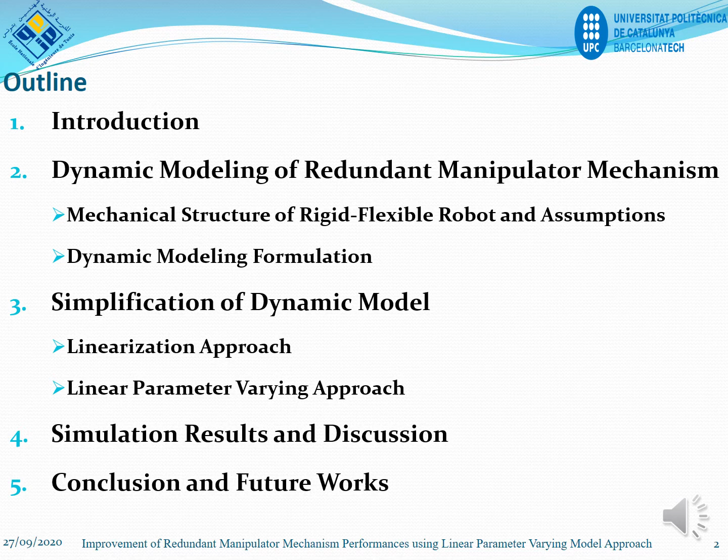The studied system described by the redundant manipulator robot is a combination of a rigid structure and a flexible structure mounted in series. These rigid flexible robots are characterized by higher velocity and lighter weight. These characteristics allow optimizing not only the time but also the energy consumption, facilitating object manipulation and improving safety. However, it causes negative effects such as important vibration and wrong positional accuracy.

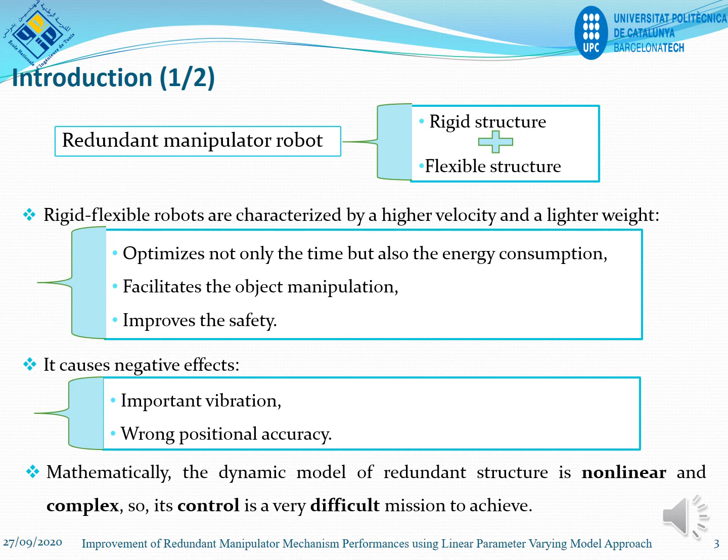Mathematically, the dynamic model of a redundant structure is nonlinear and complex. As a result, its control is a very difficult mission to achieve. To remedy these difficulties and ensure higher performance of the rigid flexible mechanism, 3 improvements can be taken into consideration: the development of trajectory planning, the improvement of the dynamic model, and the synthesis of an adequate control. In this research work, we will focus on improving the performances of the redundant manipulator mechanism by simplifying its dynamic model.

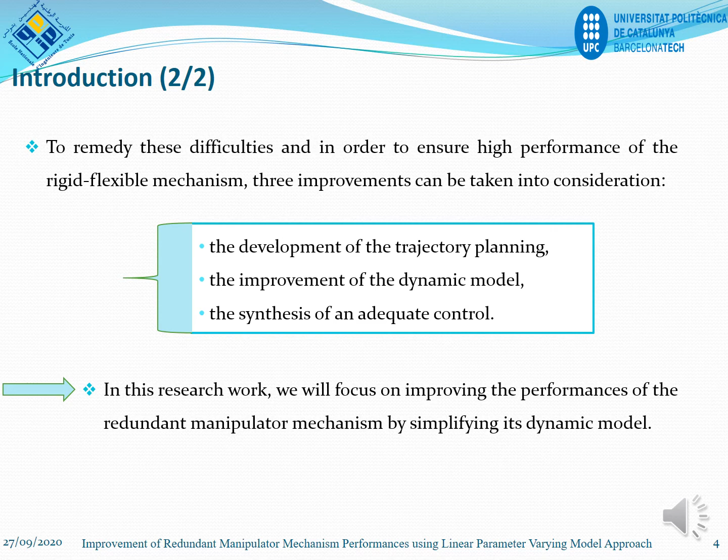As shown in Figure 1, the considered case study is composed of a rigid arm and a flexible end effector, where a mass load denoted by M is fixed on its free extremity. These bodies are interconnected using pivotal joints, where its parameters are described as follows. In order to perform these rotary connections, 2 DC motors are placed directly on the links. The inputs of this robot are described by the torque values provided by the DC motors, and its outputs are described by the value of its joint angles.

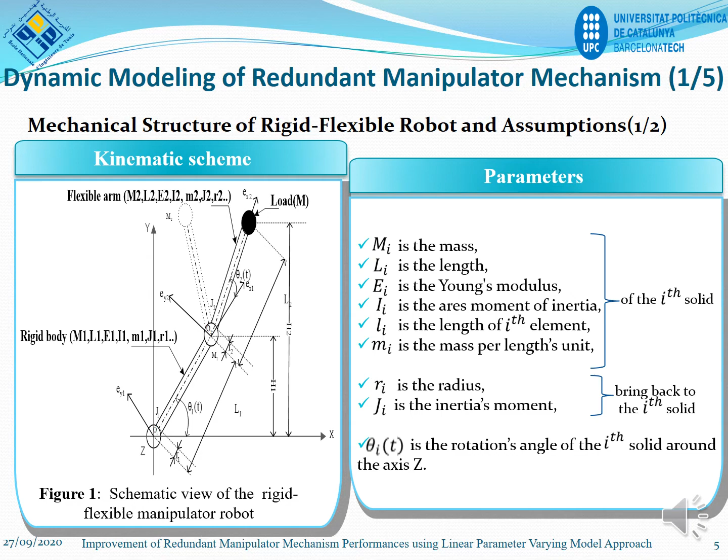So, the following dynamic modeling assumptions will be considered. First, the robot's motion is assumed to be in the vertical plane. Then, for the flexible arm, the shear strain, the rotational inertia, and the effect of axial force are ignored. In order to guarantee its vibration in the horizontal direction, the flexible arm is characterized by a depth assumed to be smaller than its length. Moreover, its length is considered constant to avoid the problems and difficulties resulting from the variability of the length of the flexible arm.

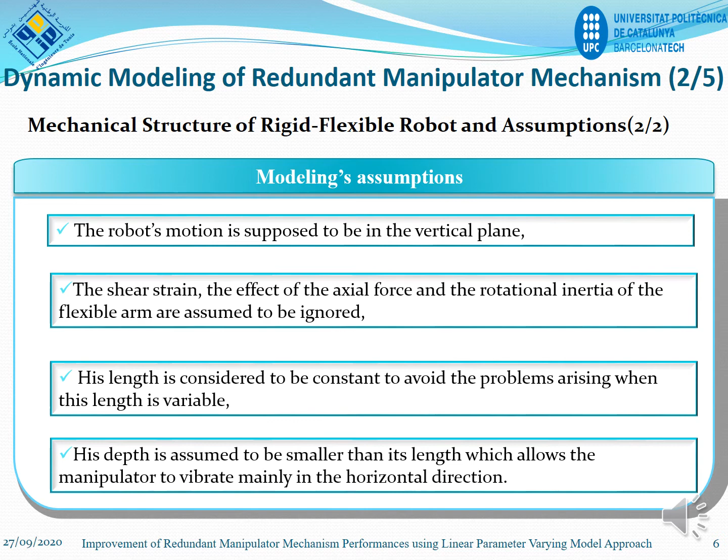Excuse me, one moment. I will do the LPV approach.

This approach is not an approximation based on order reduction, but a rewriting of the system in a form having a structure endowed with particular properties. An LPV system is defined as a finite dimensional LTV, linear time varying system, whose state space matrices are fixed functions of variable parameters as shown in equation 7.

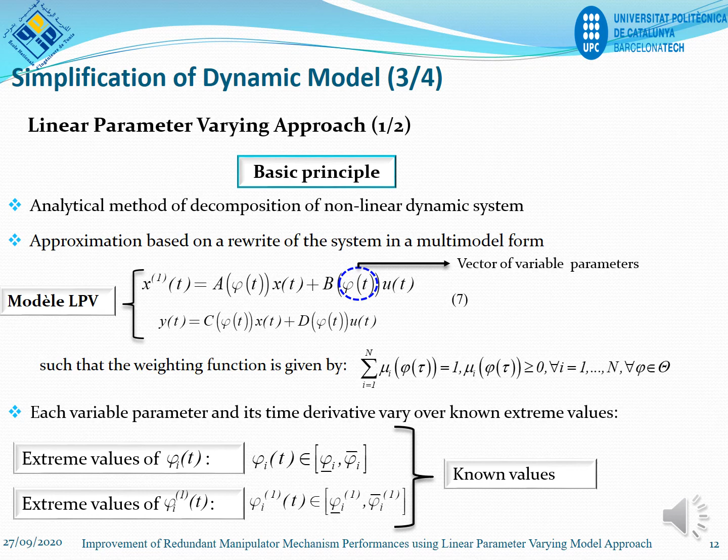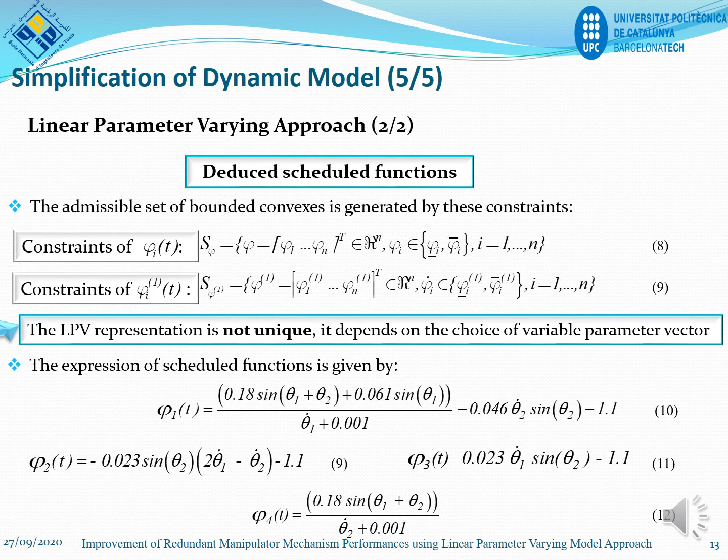Each variable parameter and its derivative vary over known extreme values as follows. The admissible set of bounded convexes is generated by these constraints, described by equations 8 and 9, and the LPV representation is not unique. It depends on the choice of variable parameter vector. In our case, the deduced scheduled functions are given by equations 10, 11, and 12.

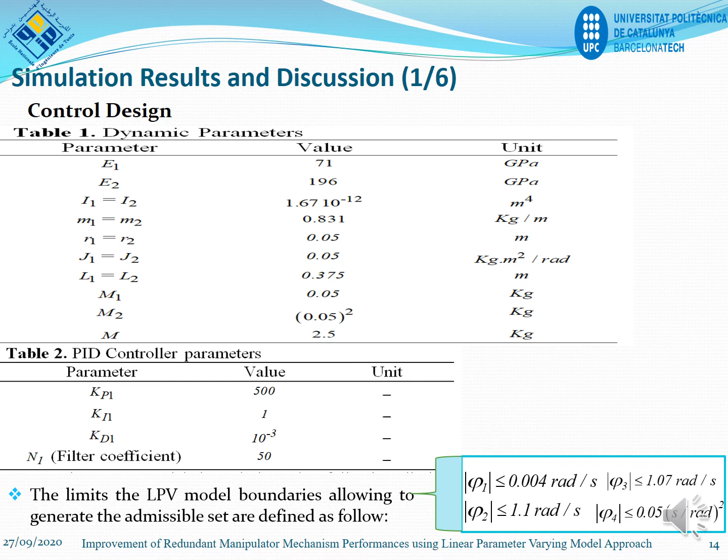Let us set the numerical values of the PID controller parameters summarized in Table 2. Concerning the LPV model boundary, its limits along generating the admissible set are defined as follows. The simulations are performed using PID control and initializing the system parameters as seen in the two previous tables.

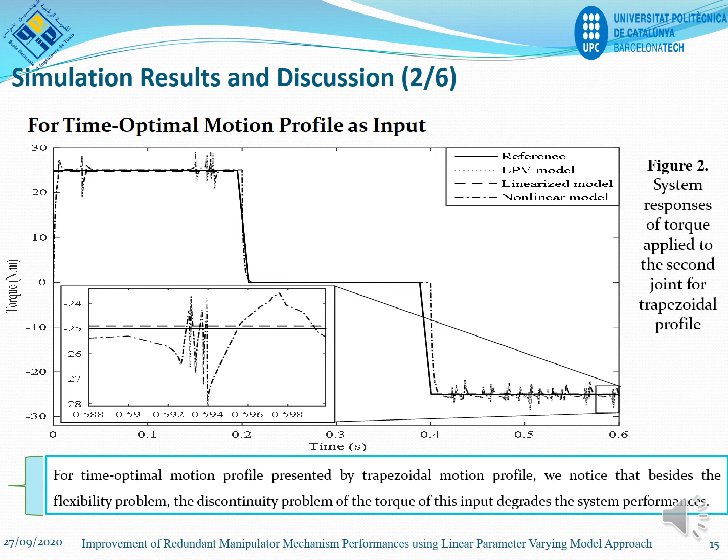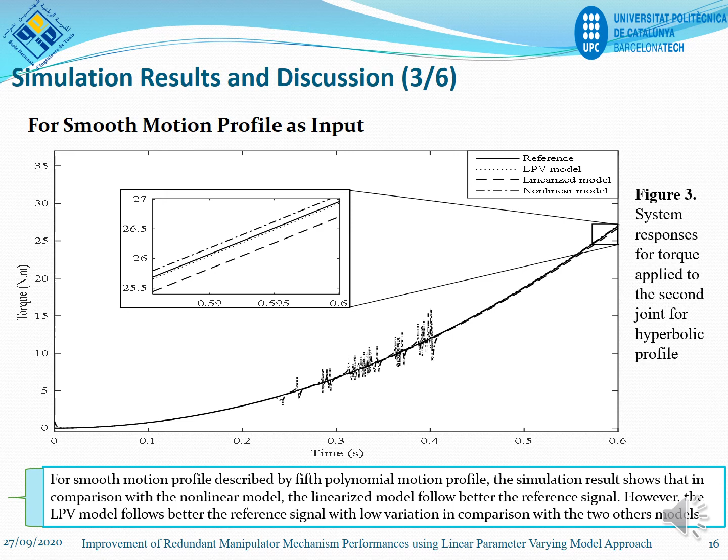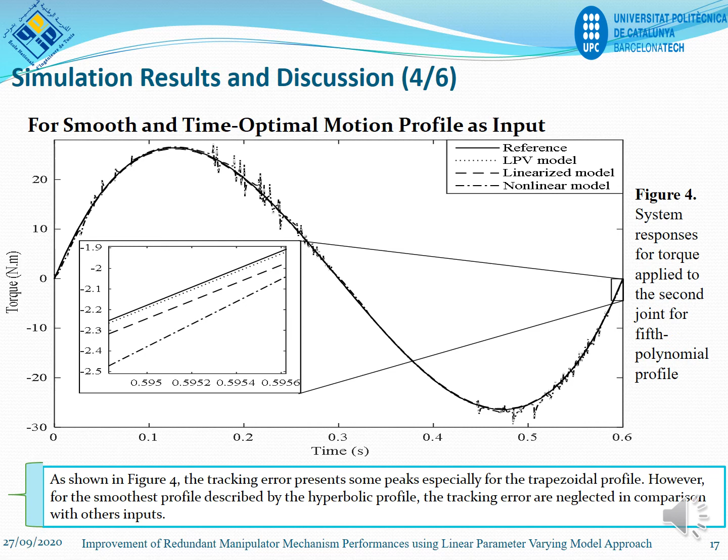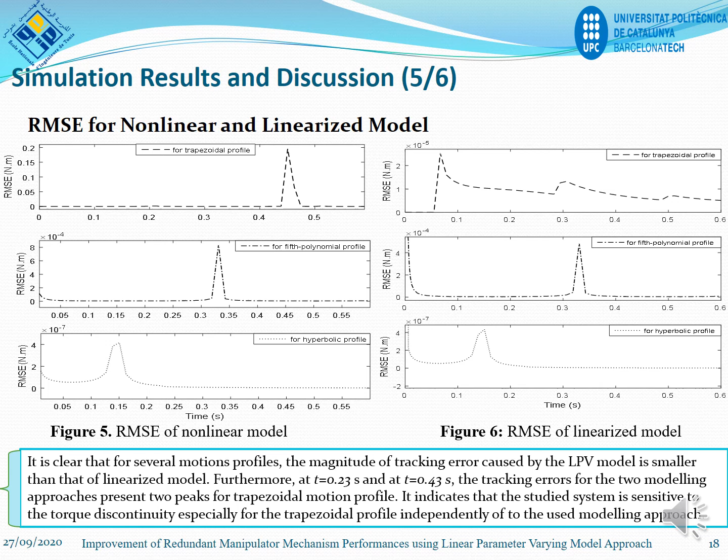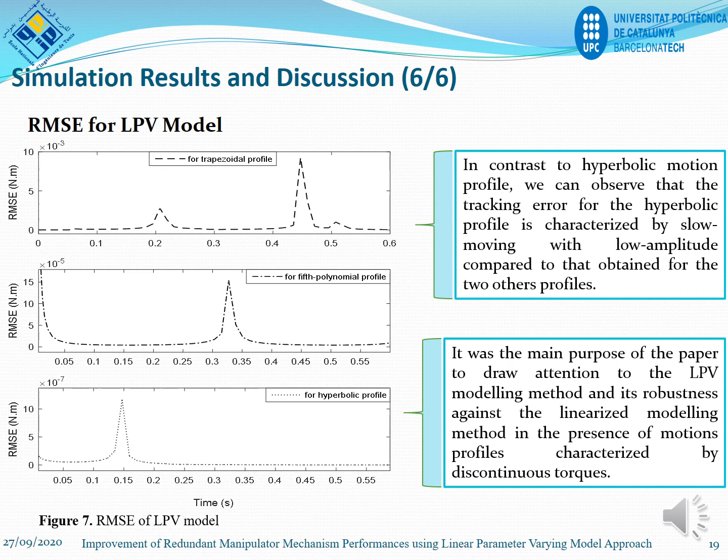It was the main purpose of this paper to draw attention to the LPV modeling method and its robustness against the linearized modeling method in the presence of motion profiles characterized by discontinuous torques.

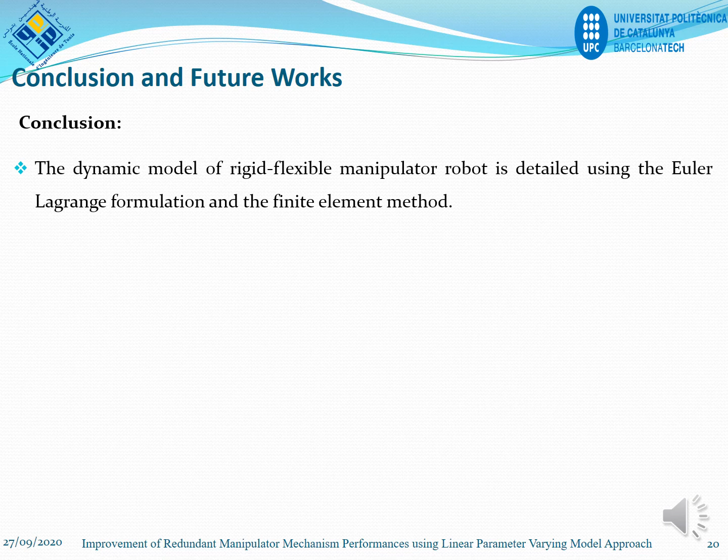In this research work, the dynamic model of the rigid flexible manipulator robot is detailed using Euler-Lagrange formulation and the finite element method. The improvement of the dynamic model is developed using the linearization and the LPV approaches. Via MATLAB Simulink software, the robustness and effectiveness of the simplification approaches are simulated using motion profiles characterized by discontinuities in acceleration.

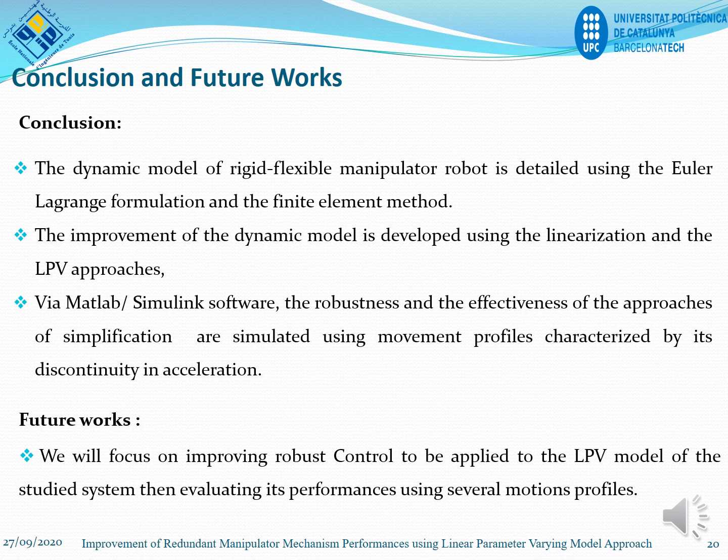In future works, we will focus on improving robust control to be applied to the LPV model of the studied system, then evaluating its performance using several motion profiles.